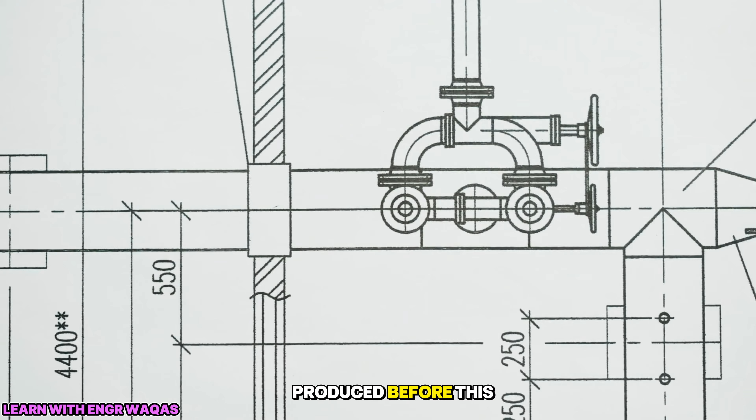This video is going to be very important: before construction of a pipeline, what kind of documentation is needed and in what sequence. There are multiple documents involved. So I request you to stay, because it is going to help you add much more value

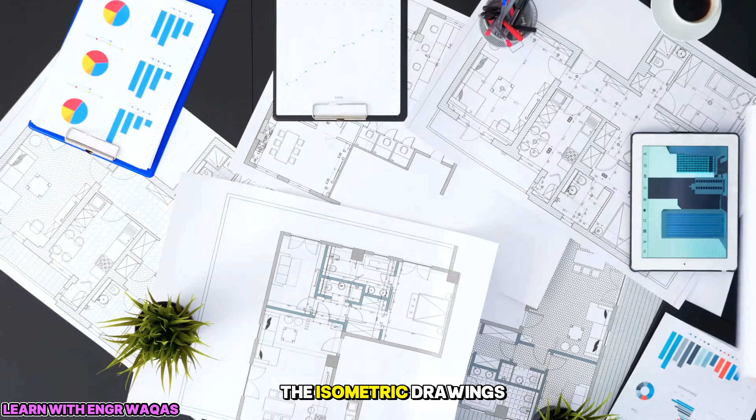When we talk about a piping project, it is not only piping engineering involved to produce all of those documents. Parallel to piping, we need process engineering, which highlights what process will be implemented, and as per that process we produce the isometric drawings and piping and instrumentation drawings. Then there are equipment drawings, electrical and instrumentation drawings. Procurement vendor documents will be initiated as per these drawings. Civil structural drawings will be there, and the 3D model development.

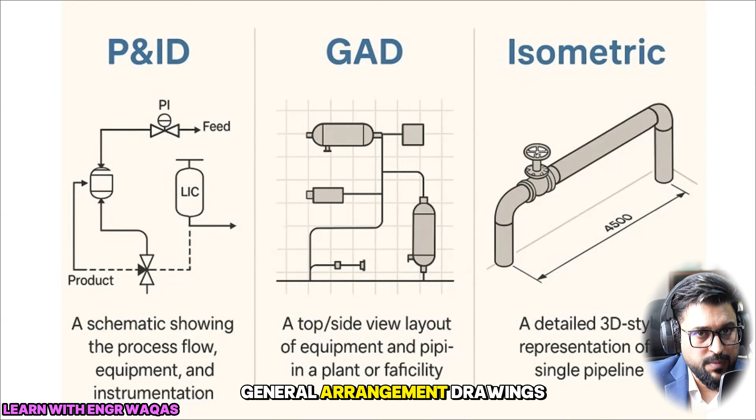On the basis of this complete agenda, you are going to coordinate in an EPC project. The EPC project will be based on all of these engineering deliverables. I'm going to take you through them one by one, but before that, these are the three final outcomes: P&ID, piping and instrumentation drawings, general arrangement drawings, and isometric drawings. When they are ready, you start the procurement or the construction.

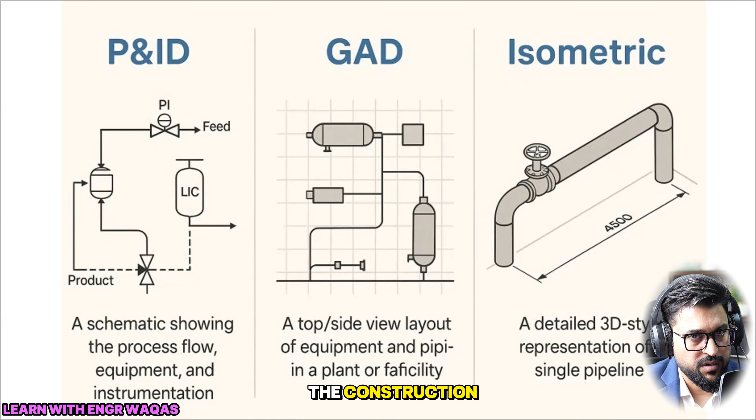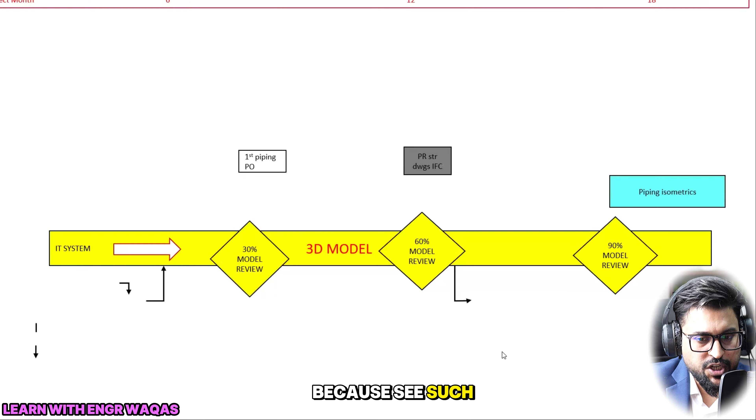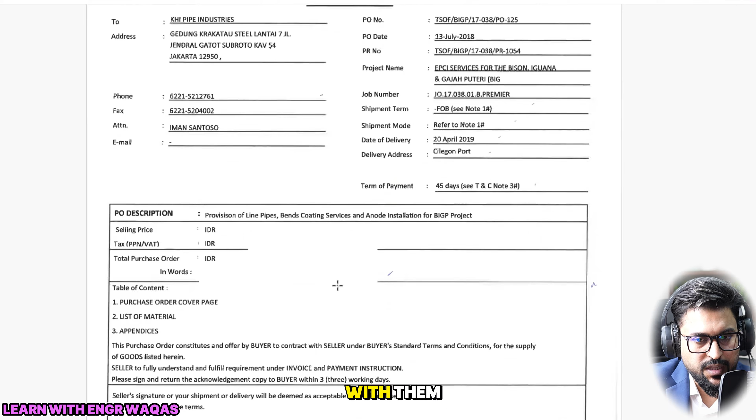I'm representing the final point here so that we can assess. The first piping purchase order is the final document. Pipe rack structural drawings, IFC: once the model is 30% complete, the first piping purchase order will be issued, and it will look like this one. With such a purchase order, you ask your third party vendors and suppliers for piping and EPCI services. Before issuing this format to any vendor, you need to complete the 30% model.

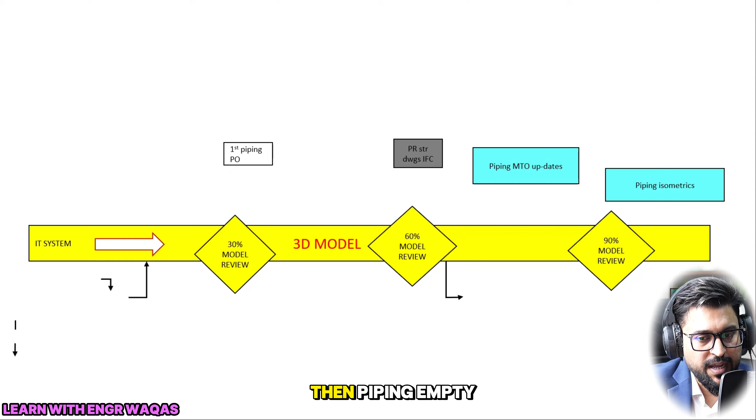I'm coming to what important information you have to collect before arriving at this milestone, right? Once the 60% model is there, the pipe rack structural drawing IFC, issued for construction, will be done. Then the piping MTO. These are important deliverables. I'm sharing all of these final documents to show you how we start our effort. So let's start from the very beginning.

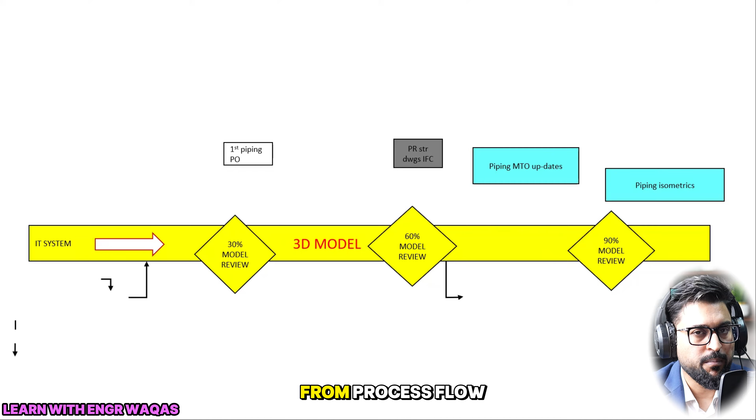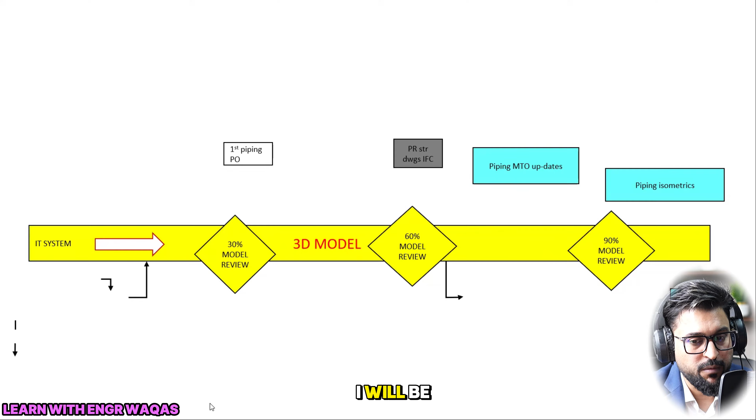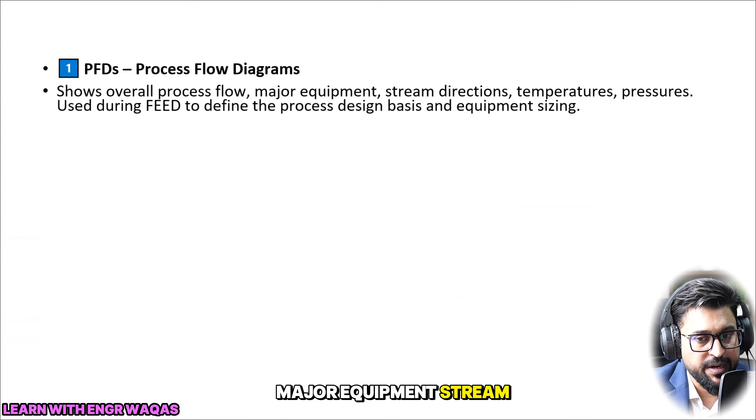You start from process flow diagrams and heat and material balance sheets. This is the first document created, just our starting point. Parallel to this, I will share what is meant by process flow diagrams. These show process flow, major equipment, stream directions, temperatures and pressures, used during FEED, front end engineering design.

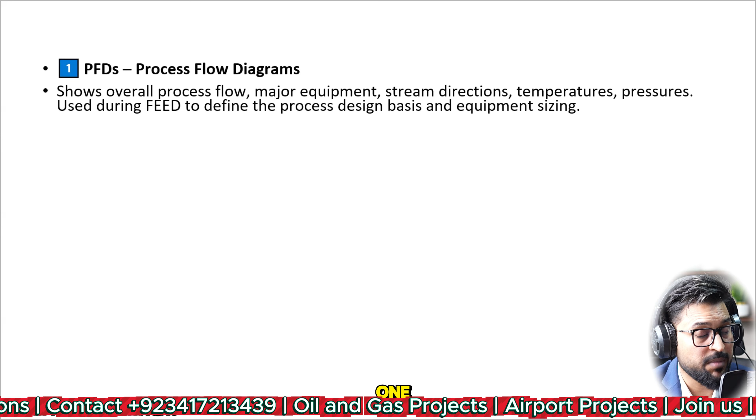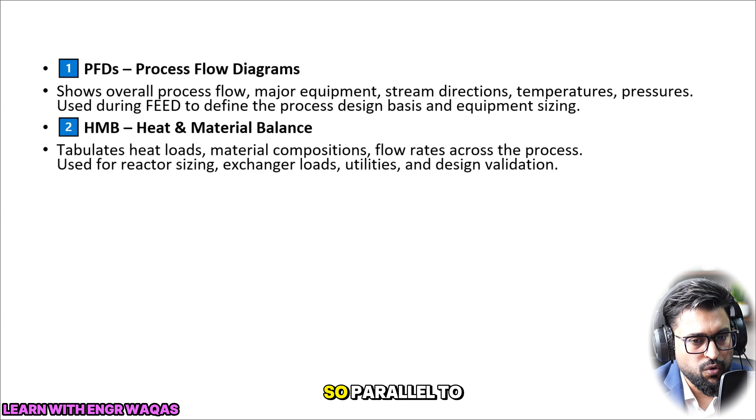And then HMB is heat material balance sheets, which is going to tabulate heat loads, material compositions, thermodynamics, and all that. What kind of heat and temperature we require to process all of that procedure, right? So parallel to that one, I will be explaining.

So once this document is clear, we are going to initiate IFR P&ID drawings, like issue for review process and instrumentation drawings. And right after this document, process flow diagrams and plot plan, IFR will be started as well, right? So the process is in light yellow color. This is going to show process engineering, whereas this color is going to show you piping deliverables, right?

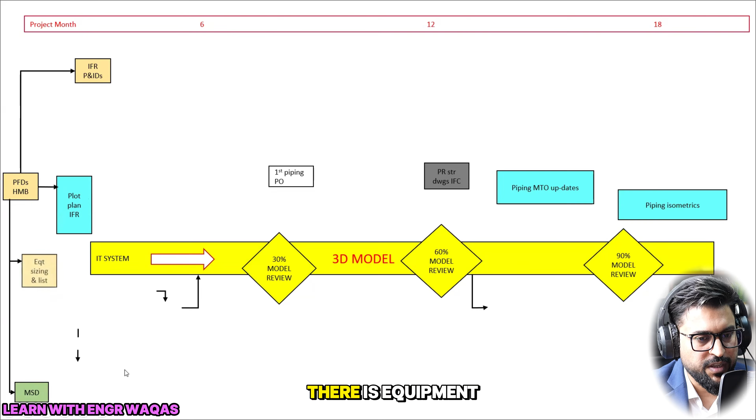So right after this one, you can also start the mechanical specification data sheets, and along with that one, there is the equipment sizing list. In parallel, all the teams are going to start their work. Their trigger point is only process flow diagrams. Here I just explained this point, right? This is the trigger point. Once it's done, the concerned team is going to start, and it will go into IFR.

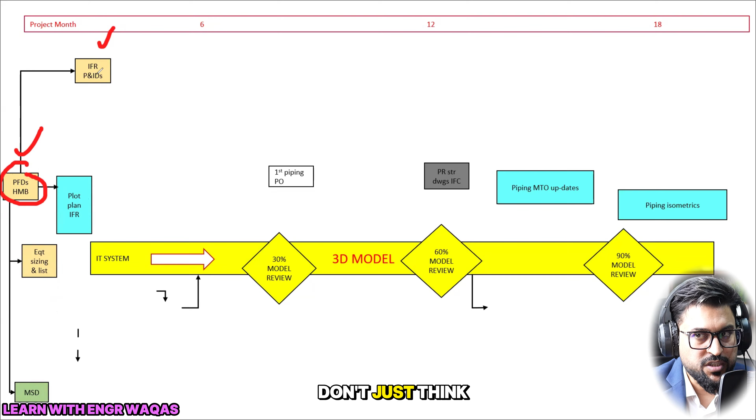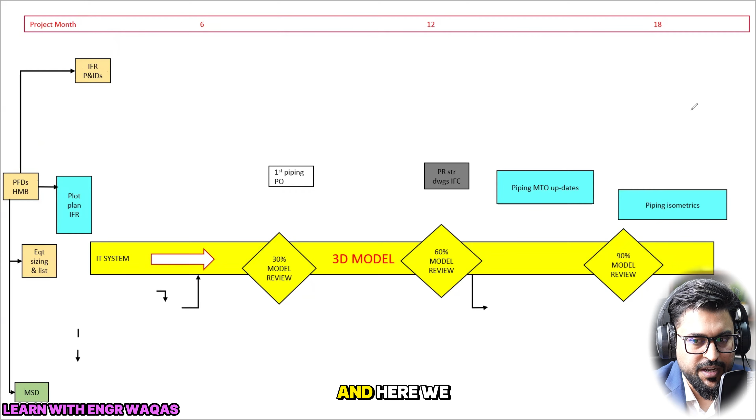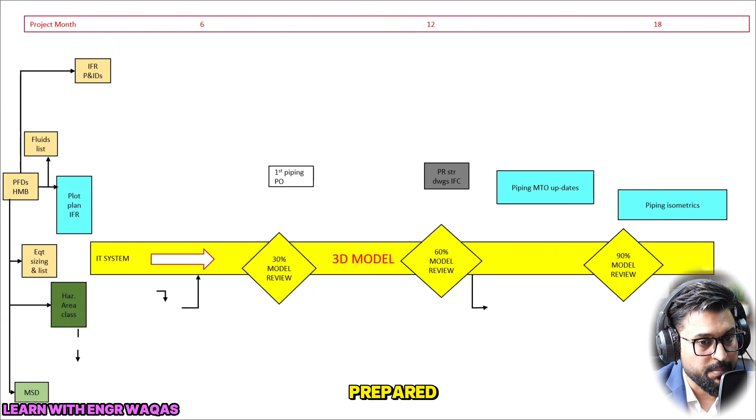But don't think that it will be directly like process. No, before that there are many other predecessors or inputs, right? So I'm just sharing this flow diagram, and here we are. See, once this one is there, hazard area classification will be identified. All these things will be triggered, but at the same time, before the plot plan, the fluid list will be prepared. The fluid list is what kind of hydrocarbons or fluids we are going to process or transport through these pipings.

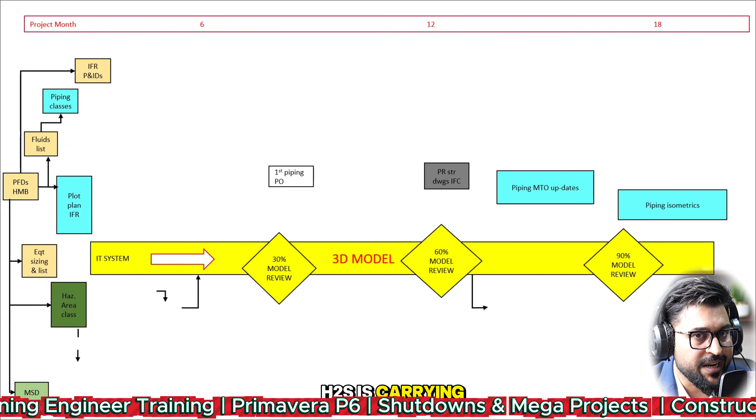And then after this fluid list is there, we are going to start piping classes. Like if I need oil from a reservoir having pressure like 3000 psi, then on the basis of that, we are going to make design parameters. So the fluid list, what kind of fluid is there, what kind of H2S it is carrying. On the basis of that, I'm going to classify that this piping should be on the basis of MR0175, which is going to handle that H2S as well, right? So I hope you can understand.

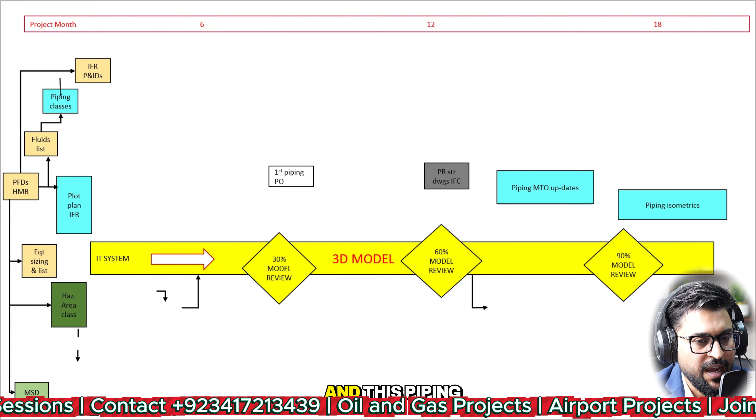On the basis of this fluid list, you are going to define piping classes, and this piping class is also going to define your process and instrumentation drawings. So after this plot plan, you are going to start your line diagram. The line diagram is going to specify how many valves are there, inch dia, temperature, pressure, and many other parameters, right? That is only possible after this plot plan.

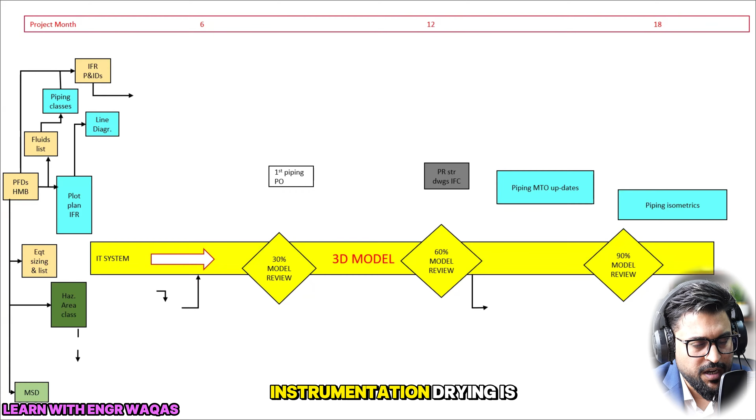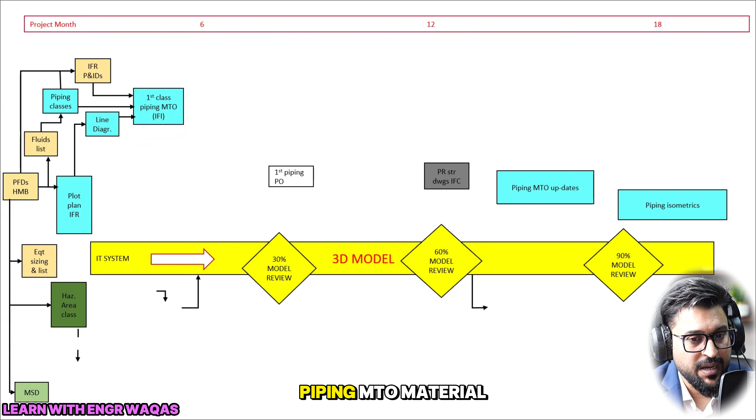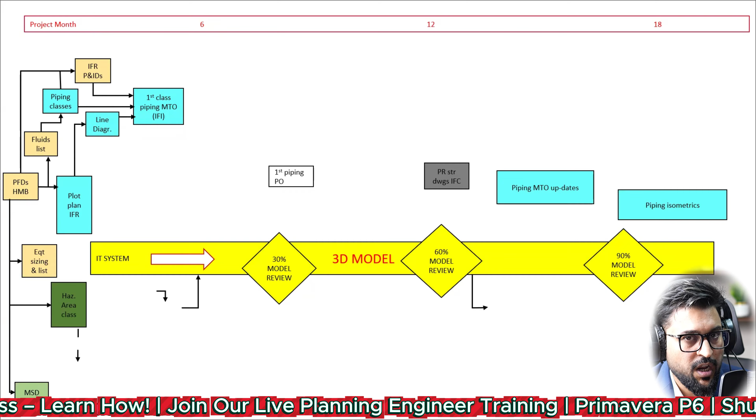So right after this line diagram, you can see that once the IFR process and instrumentation drawing is there, we are going to be ready with the help of inputs. Piping classes are there, so there are three inputs right now. So see, first piping MTO, material take off, right? The quantity surveyor or estimation guys are going to take off the quantity. This is going to be the first MTO. They are going to calculate how much piping will be utilized on the basis of this process and instrumentation diagram. You understand? So these are three important inputs.

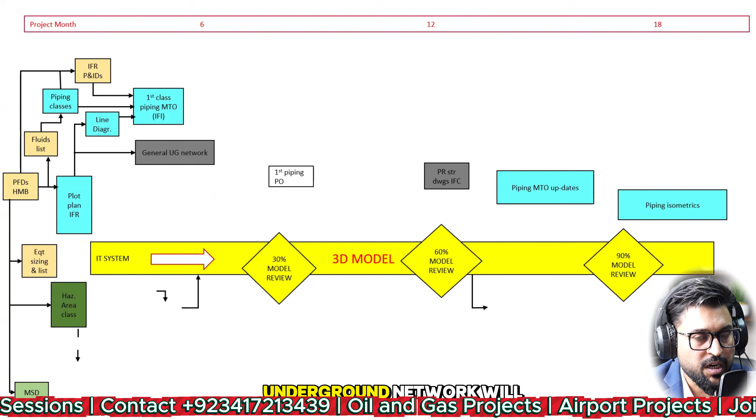And the plot plan is going to trigger not only the line diagram, but also the general underground network, like how much piping and how this underground network will be going on, right? And this network diagram will also be helping to measure our first piping calculation as well. So these are the four inputs required for the first MTO.

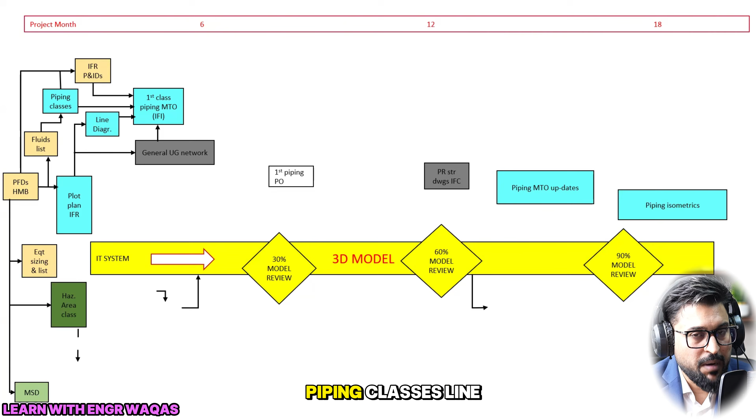So many people are going to ask you in a job interview: okay, you are going to be on the first piping MTO, so what are the possible inputs or documentation you need? You should answer IFR process and instrumentation drawings, piping classes, line diagram, and underground network, something like that. This is directly coming from industry-based practices. So this is a very valuable diagram, right?

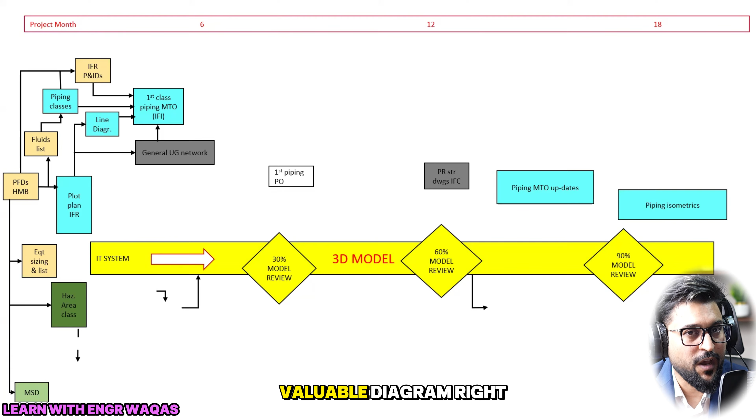So on the basis of this line diagram, you are also going to make pipe studies further on. And then, once the piping and instrumentation review is done, after that, you are going to make the issue for design piping and instrumentation drawings. Okay.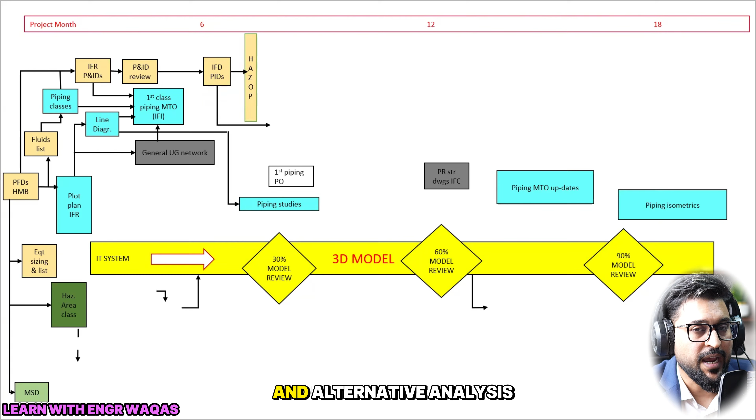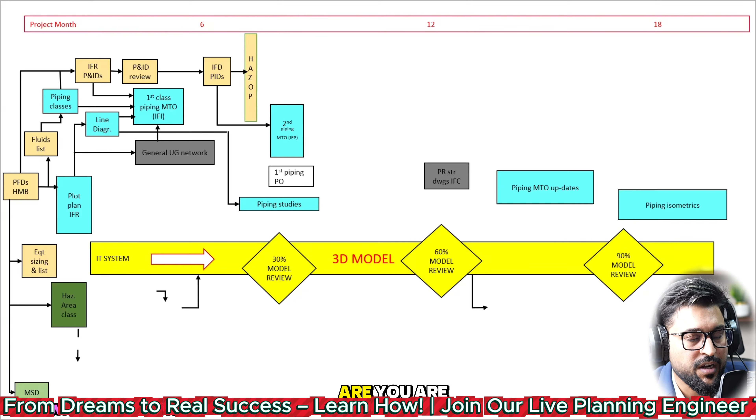And then it is going to give you two inputs, hazard and operability studies, which is going to help you to assess the risk, and alternative analysis as well. And there are two outputs, second piping MTO. Once these IFD P&ID drawings are done, then you are ready to go for your second MTO, right?

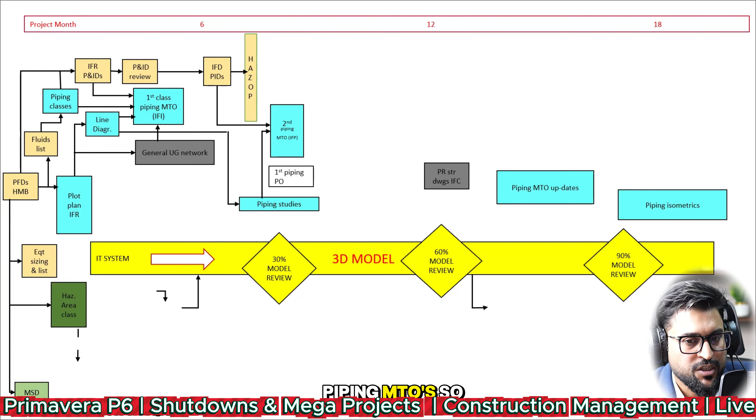That is more accurate. And then piping studies are also going to play an important role as an input for the second piping MTO. So the output of this second piping, this is the first deliverable we are going to get. Right after this second piping MTO, we are going to make the first piping purchase order issue. This template will be issued to the concerned authorities, see this one. Okay.

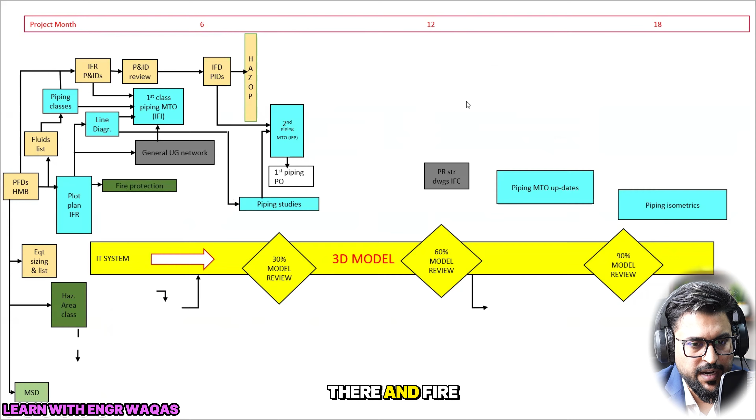So this document is an output, but before that, we need to go through all of that process. I'm talking about this complete one, right? So now after this one, plot plan is there and fire protection. Once plot plan issue for review is there, the fire protection study will be started. Main cable routing will be started. Then plot plan review will be there. These are the three outputs after plot plan, right?

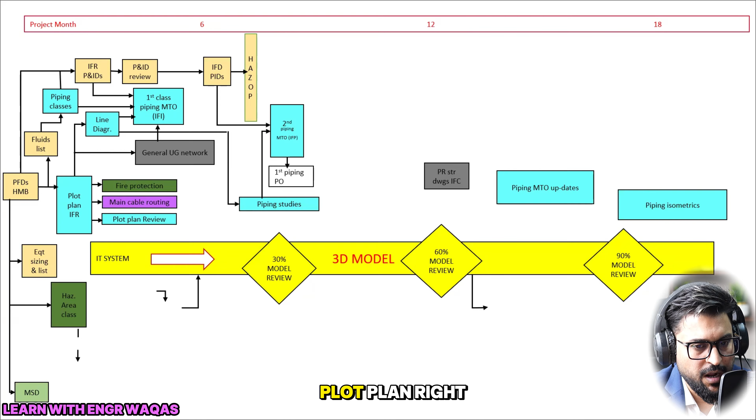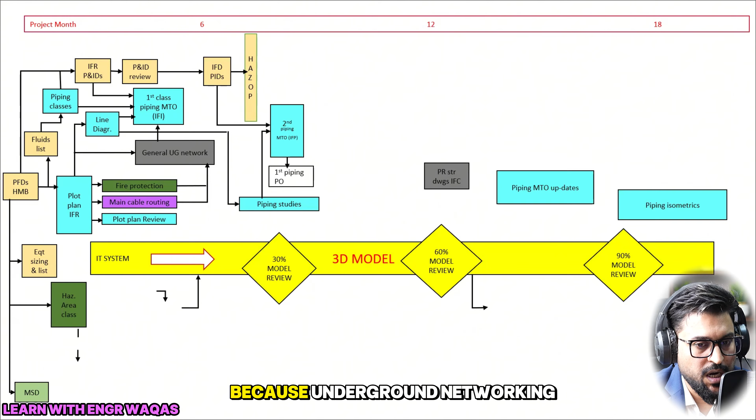And after these, underground network is going to contribute within the first piping MTO, because underground networking is not possible unless you mention them. And this is going to make input for this one. So every single thing is very important, right? Then you can see the plot plan is going to help you for the 30% model as well. At this moment, you can see that equipment sizing is also going to contribute as an input for this plot plan.

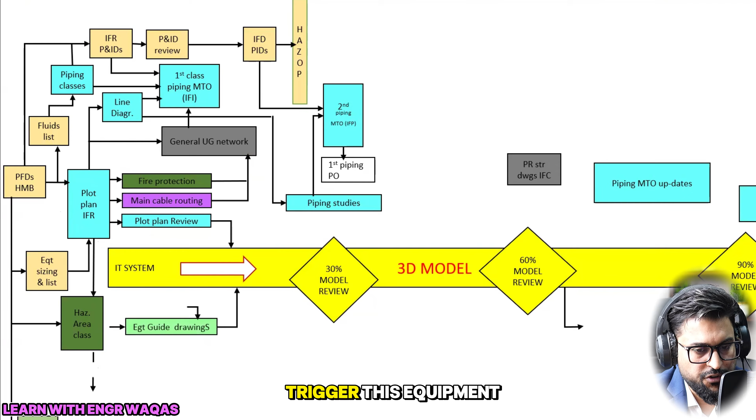And the plot plan is going to play a very important role for these three studies, and as an input for this one. Everything is interconnected, right? But here, the flow diagram is going to help you understand things in a single way, right? So here we are. Plot plan issue for review is also going to trigger hazard area classifications. And this hazard area classification is going to trigger these equipment guide drawings.

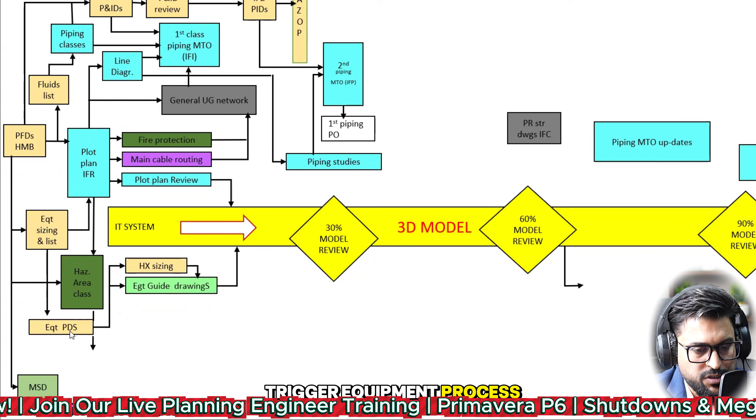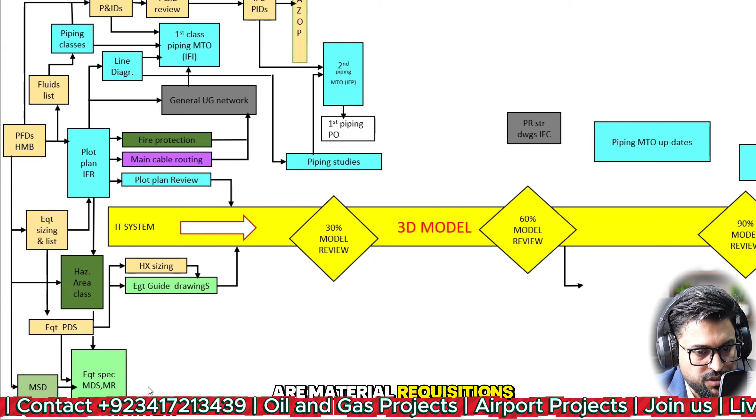Okay. And then, of course, process data sheets. Equipment sizing is going to trigger equipment process data sheets, and this is also going to play an important role for sizing. And after that, equipment process data sheets are going to serve as inputs for equipment specifications, material data sheets, or material requisitions. It is going to be a very important point for procurement as well, right?

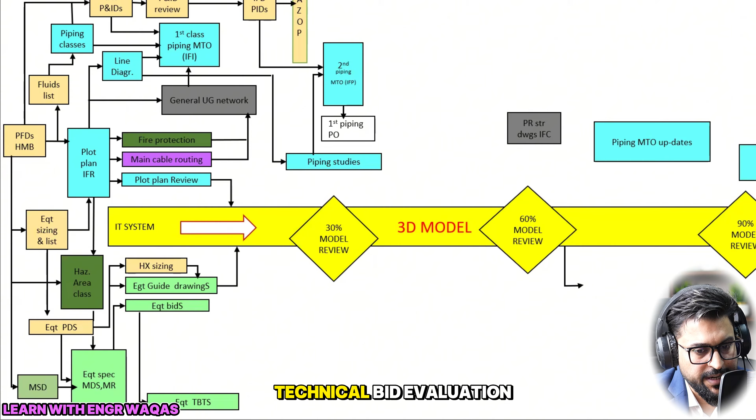And then you can see equipment bids. You are going to look for suppliers who offer such kinds of services. And then equipment technical bids and technical bid evaluation as well, right? So equipment purchase order issue will be done right after this evaluation.

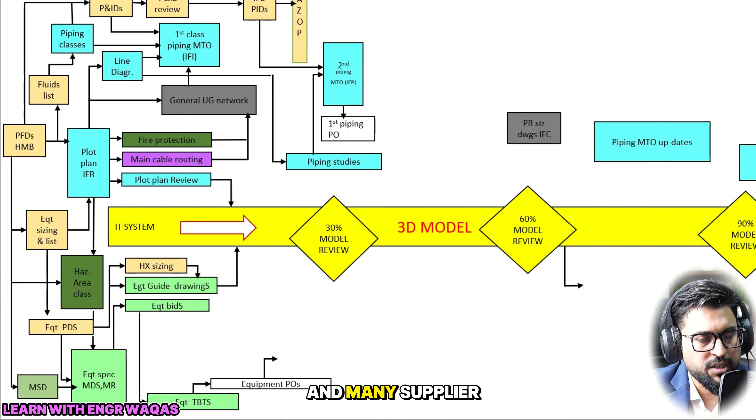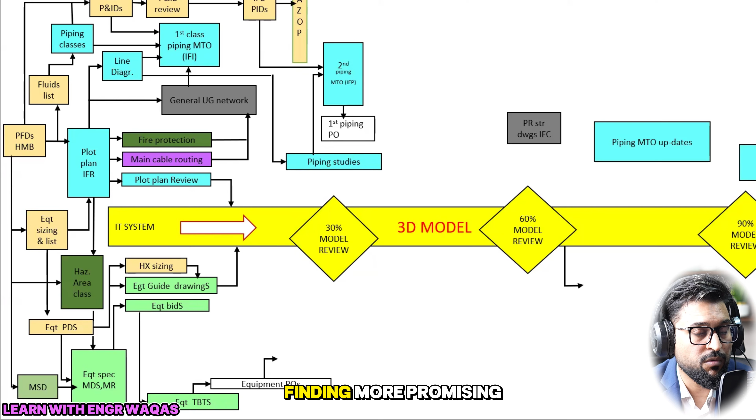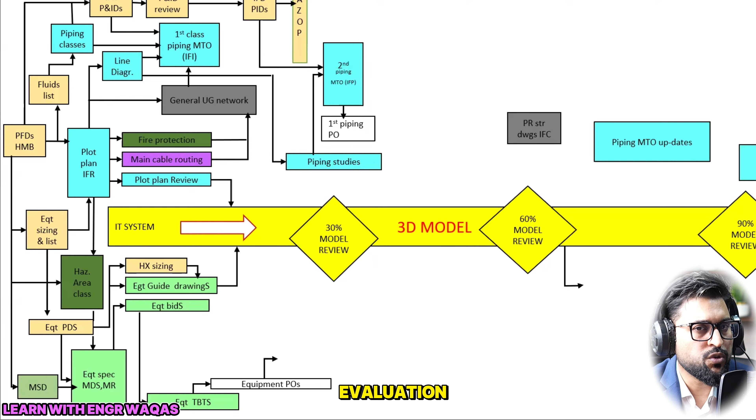In procurement, what actually happens is you advertise what kind of equipment you require, and many suppliers and vendors in the market contact your team. Meanwhile, your team receives their bids and offers and evaluates which one they find more promising and fulfilling the specifications. That is called TBE, technical bid evaluation. Right after this evaluation, you highlight one supplier, have a meeting, and make the commitment. Then you make that purchase order issue.

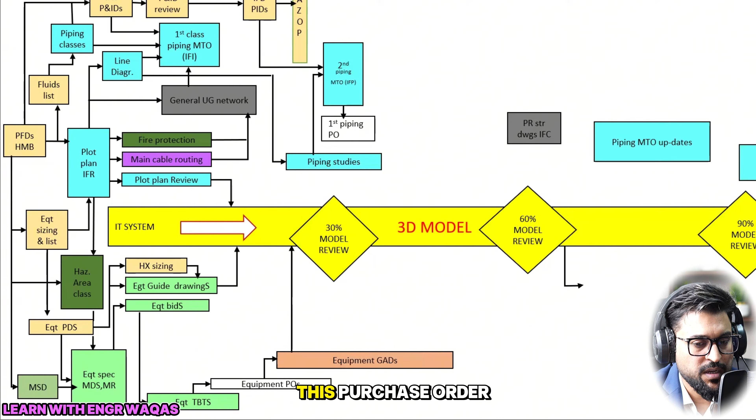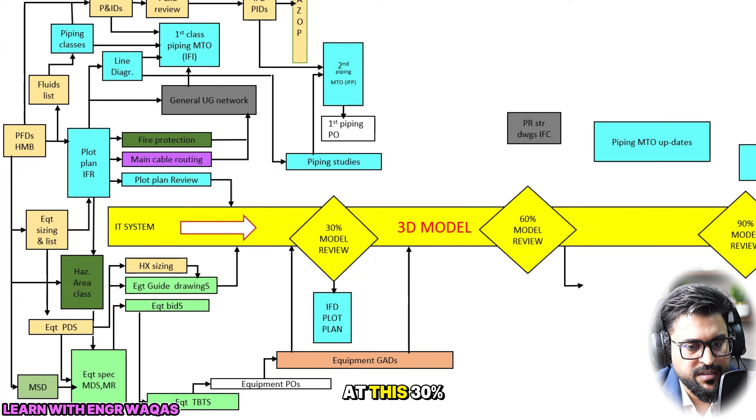Right after this purchase order issue, you will be giving equipment general arrangement drawings, complete drawings, as per which you require that equipment to be done. So the 30% model is going to give you these outcomes: first piping PO, and at the same time, equipment general arrangement drawings, right? So right after this 30%, we are now proceeding towards the 60% model, at this 30% issue for design plot plan, right?

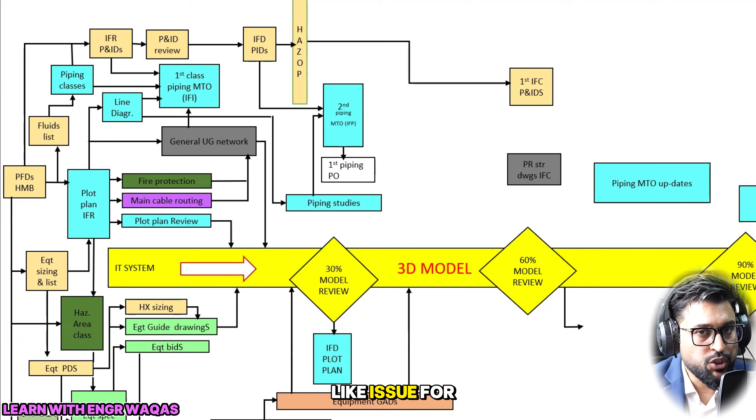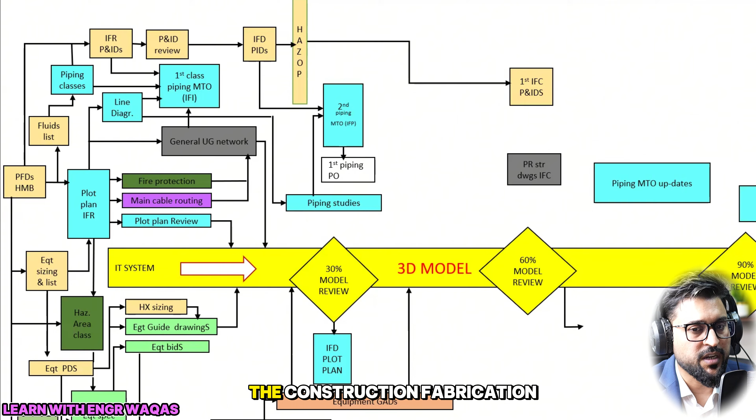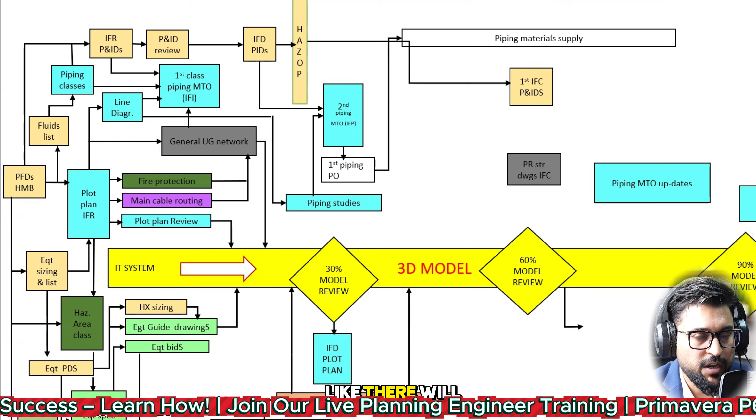Right after the hazard and operability studies, you are going to make the first IFC, issue for construction, of the process and instrumentation drawings; all the P&ID drawings will have their first IFC issued. When IFC is there, you can start construction, fabrication, and all that, right? Right after the first piping purchase order, you start piping material supply, procurement will be initiated, and equipment vendor drawings will be there. Vendor drawings also act as input for this first IFC.

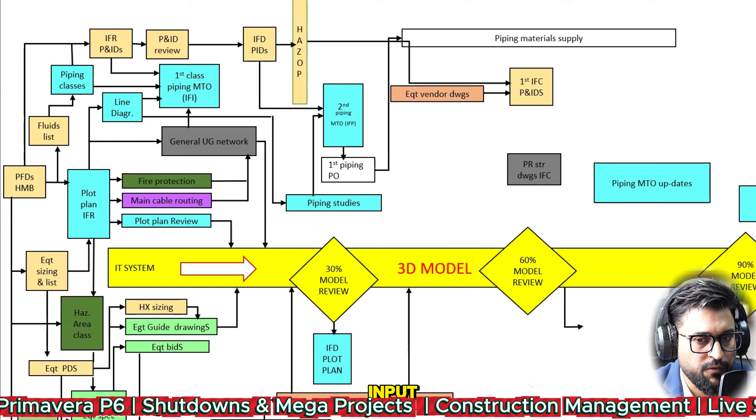And then right after these piping studies, you can see stress analysis for piping. And right after this one, you can see piping calculations, right? And then the second and third, because this one is the first, this one the second, and the third document will be produced, right?

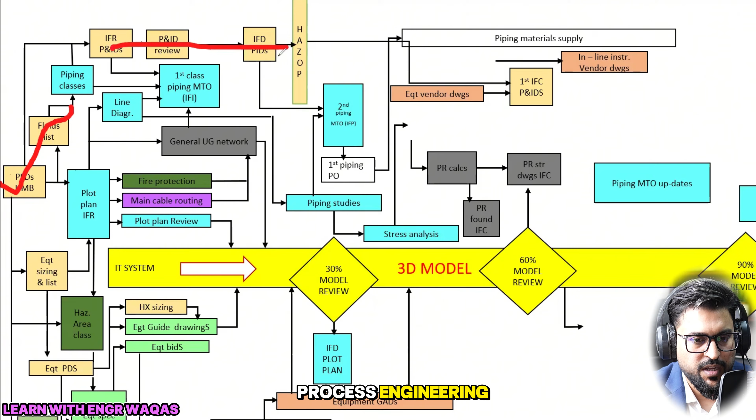But right after this calculation, you are going to find out the IFCs as well before this 60% model is done. So then you have here inline instrumentation vendor drawings, because procurement is also going. And right over here, this is actually a process engineering color. See, this is process engineering. These are the piping equipments, and these are somehow procurement oriented.

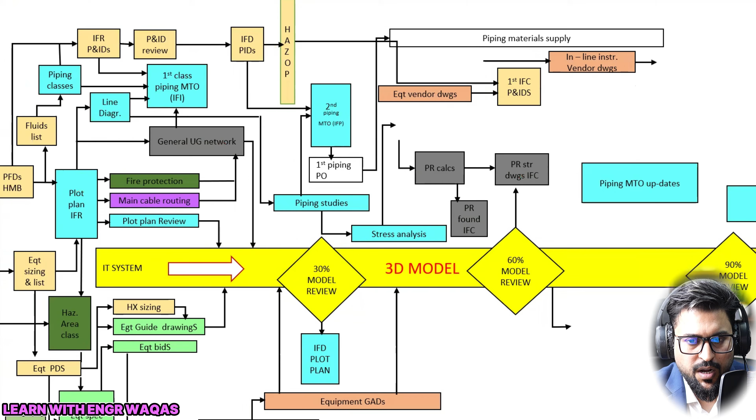Okay, so here we are. And right after this instrumentation vendor drawings, last IFC process instrumentation, right? This will be initiated. And before that, there are further more. Let me share with you. And here we are. See, after the equipment general arrangement drawings are done, you are going to make IFC plot plan. And right after this equipment setting plan, equipment foundation IFC.

And then you can see process structure IFC. This is civil, right? This is foundational IFC. These are actually for the civil drawings. Now, civil drawings, how they are going to correlate with the piping and process, and electrical, everything is kind of very amazing, right? So you will understand the real industry.

The people who are mid-career planning engineers, they are going to find it very valuable. The people who are freshers, they don't feel like, oh, how I can understand. They just make a very high level understanding.

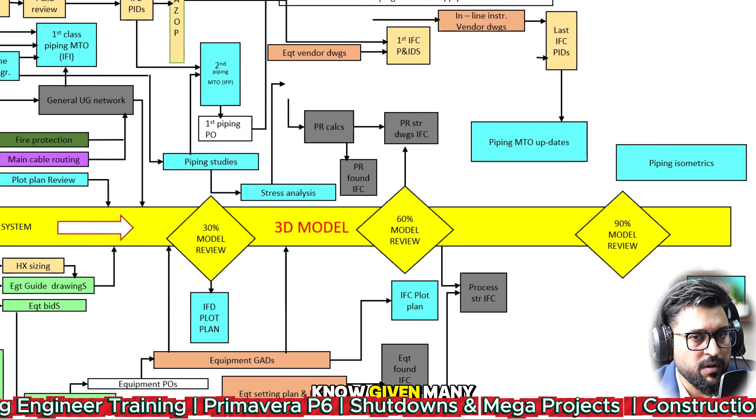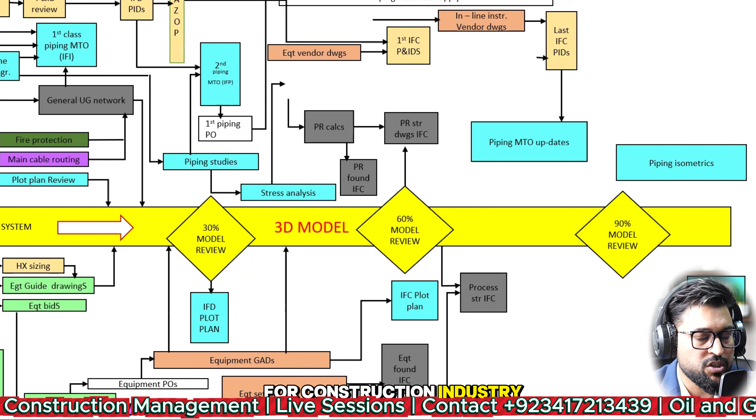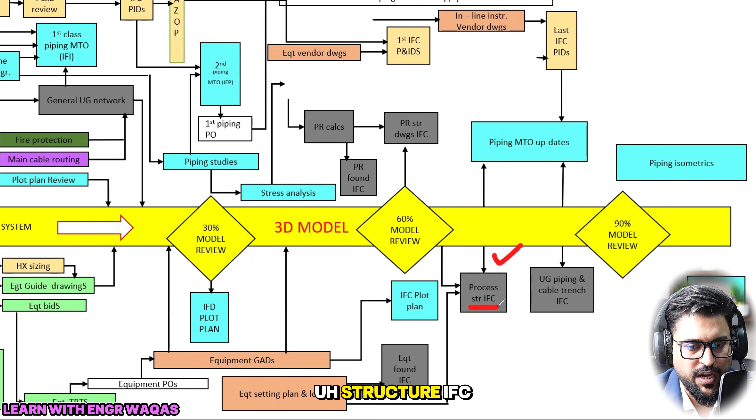So here I'm actually explaining right now the documentations right after the piping MTO updates are done. Because once this process structure IFC is done, see, after that underground piping, cable trenching IFC will be done. And this is going to be input for this piping MTO. These are 3 inputs required. Okay, so after this one, you can see there are 2 important things, like piping support calculation loads, and this package vendor drawings. Once packaged vendor drawings are there, you are able to do this one.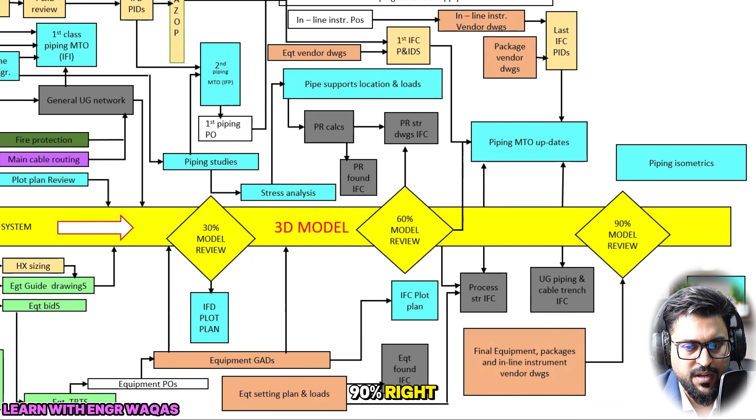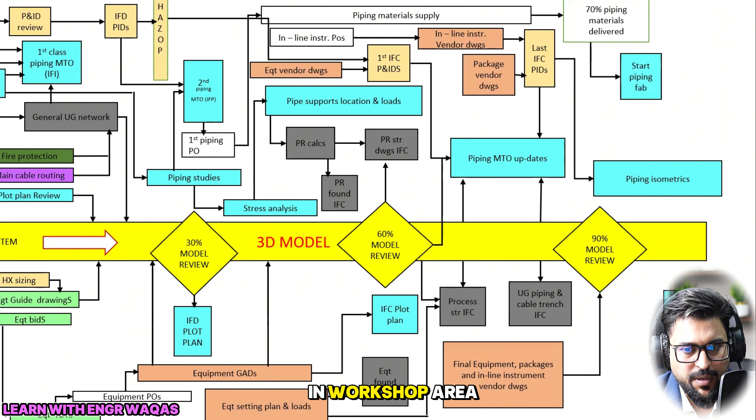Okay, so right after this one, you can see there are final equipment packages, 90% model. Final equipment packages are only doable once we are after 60% and in between 90%, right? And then material supply, 70% piping material delivered. In this situation, start piping fabrication in the workshop area. Piping isometric drawings will be done right after IFC P&ID drawings.

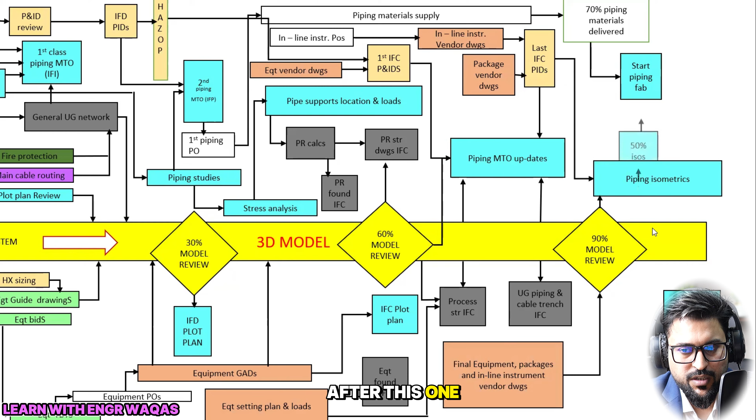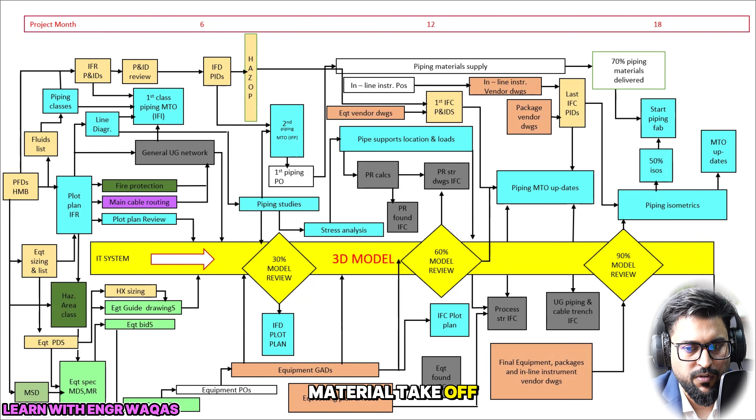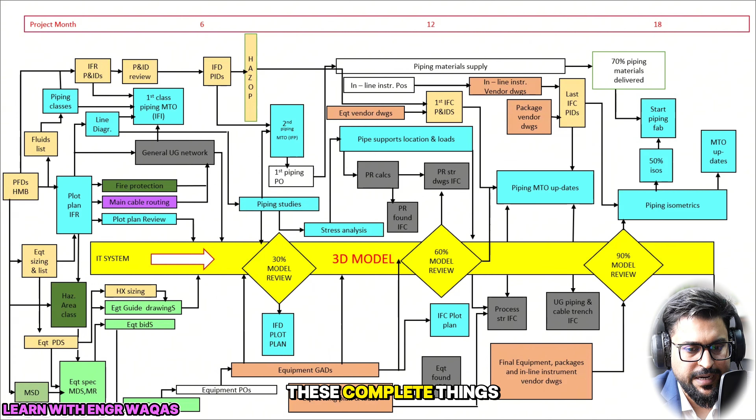And then you can see that after this one, your 50%, this is going to complete the loop. Okay, and then it is going to help you with how to complete your MTO updates, material takeoff, and piping general arrangement drawings will be done in the last stage. And right now, I can share with you step by step the understanding of these complete things. There are HMB, IFR, these are the abbreviations.

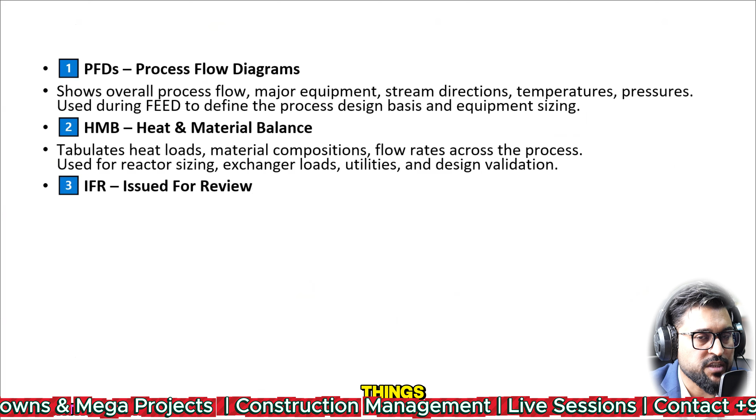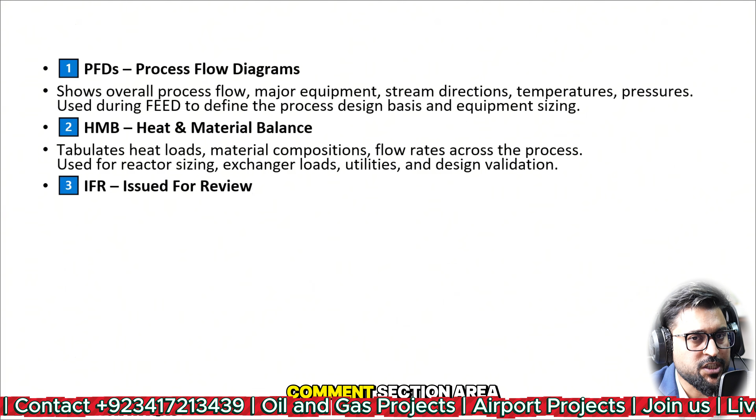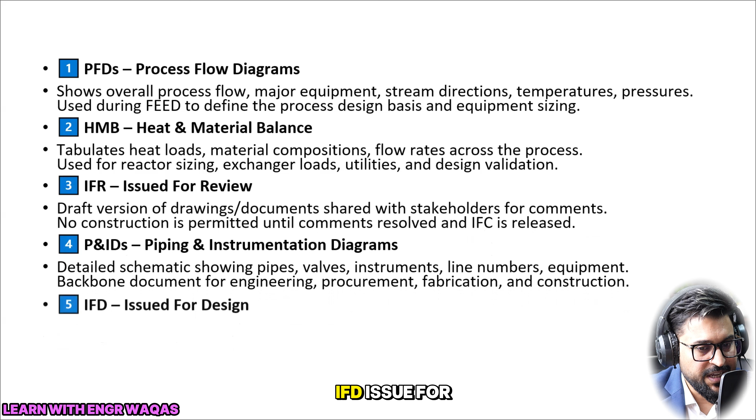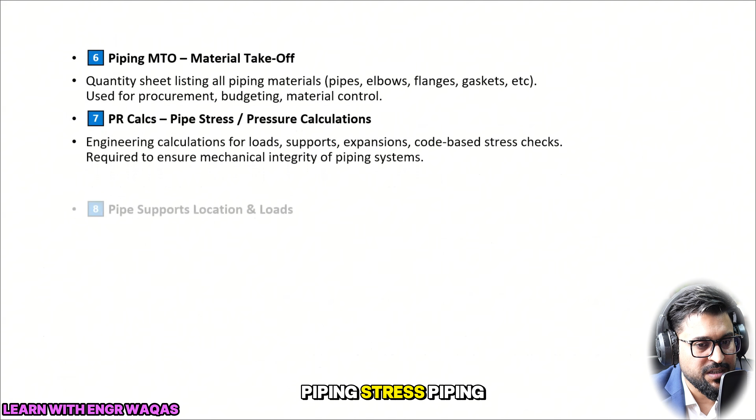So you can see IFR means, because many people out there might not possibly understand all of these abbreviations. So piping and instrumentation diagrams, what is inside this drawing? IFD, issue for design, what is inside this drawing? You can see over here piping MTO, what is inside this document? This calculation, piping stress, piping support calculations, what is inside these documentations? Everything I have given in a detailed way.